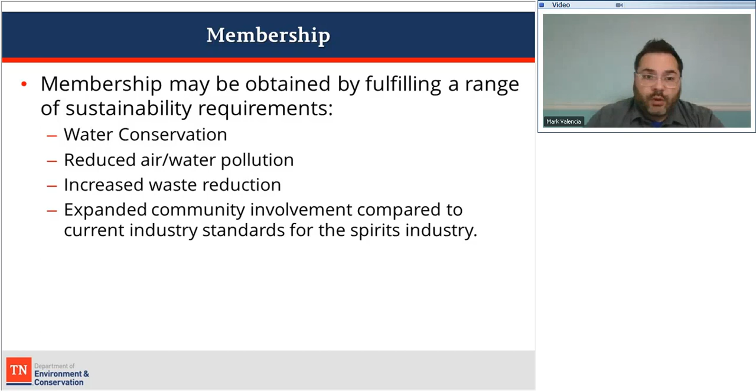So membership is obtained through several different categories. I'll go into the next slide to discuss that, but we have a checklist with 49 elements, and you have to meet a minimum of 25 items on this checklist. This covers water conservation, air and water pollution, and waste reduction. We like to include community topics as well, and I'll show you that in the next slide.

To become a member, you must apply. The application process is fairly simple - we have a single one-page application with your general information on it. In addition, you must submit the checklist I just discussed, showing that you're doing at least 25 of those 49 items listed, and you have to submit your annual utility data and production data.

So we need last year's water bill, electric bill, and gas bill, and how much you produced. The reason for that is we will normalize this data and produce a ratio. For example, we can show you it may take 5 gallons of water to produce 1 gallon of beer, or it may take this many kilowatt hours of electricity to produce a gallon of distilled liquor. With this data, we can compare it to national and international averages developed through other organizations, and show you where you stand among your peers.

Another reason for this is to establish a baseline. So in the future, you can see if that ratio is getting smaller based on practices you implemented after we did this. It's also a great way to look at your overhead - it shows you exactly how much water and electricity it costs you to produce your products.

Once we get all that data, the checklist and application, we will review all this information, compile it, and do some data analysis. We will also work with our Office of General Counsel within TDEC to make sure an applicant isn't undergoing any regulatory issues within TDEC. If they are, we'll let them know they can't be a member at that moment, but we can work closely with them to get back into compliance, connecting them with the right people within TDEC to get it worked out.

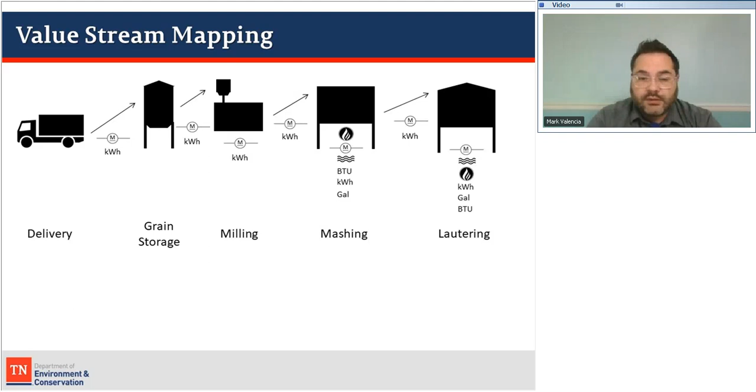A really good, interesting example as well is in the mashing process. So now you've got energy to heat up. So Bill may be able to show us ways we can reduce the gas that it takes to heat up that liquid. But what we're showing right here is the gas that it takes to heat up your liquid for mashing in. There may be an electric motor mixing that mash, and then you have water. So we're going to try to look at all of those steps and processes to see how much energy is being used in each step of the process.

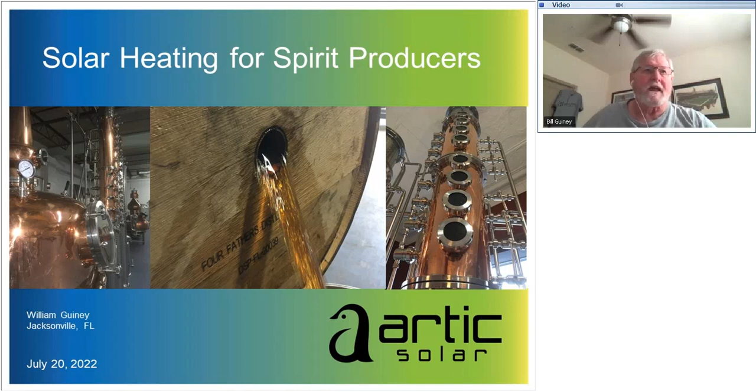Your program sounds outstanding. It's something that should be replicated in all states, no matter what the industries are. This is how you connect industries to the potential to save energy, reduce greenhouse gas emissions, and save money. So I'm going to talk about the solar heating applications for spirit producers. This would apply for basically any of them. It's a heavy lean toward the distillery side of the business, but wineries and breweries have much the same needs as far as heat goes. So I will also review the technologies briefly to talk about the application of the different solar technologies.

So, $60 million on energy was spent by distilleries in 2018. Unfortunately, COVID kind of put the squash on a lot of the craft brewers and craft distillers. Many of them I know actually stopped producing alcohol and started making hand sanitizers. So that became a fairly decent business to fill in the gap when their spirit sales were down. One actually was even making CBD oil for marketing to users of that technology.

So, we all know where the heat is being used, how it's used, and the importance of it. The advantage we've got today is we can produce enough heat to actually create steam. So I've got different ideas about how heat should be used in facilities. Many of them are double jacketed pots with steam injection. It can also be done today with high temperature hot water rather than converting it to steam, which takes an additional 970 BTUs to do that. We can utilize high temperature hot water running through the pots, but that's going to be slow in coming because it's a radical change from a supplier standpoint.

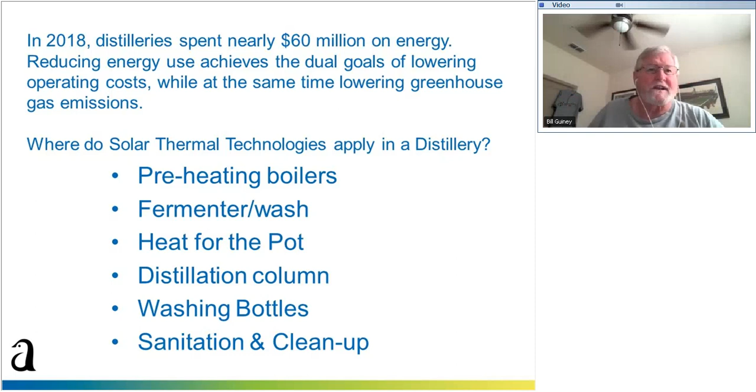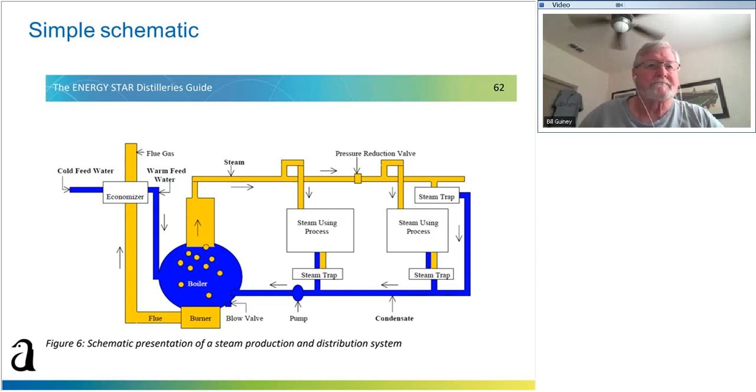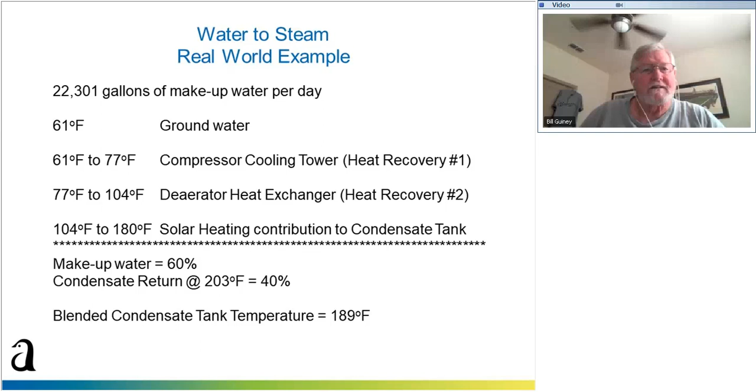Because the solar systems aren't cheap, there's obviously a capital cost to that, and the more you can reduce the size of the solar array to give you the production you need, obviously the better, the lower cost for the user. So this system, in order to raise the temperature up, was going to require 345 solar collectors. Because of space limitations, we could only use 288 in the calculations.

So the watts per square meter is the actual daily energy produced at the site. And I actually got this information from the user that meters both their direct and their diffuse radiation, so we're able to come up with our average annual and our average daily watts per square meter of energy that's available. And what's important about that is the delivery temperature is dependent on the sun. So knowing what that average daily production is as far as watts per square meter or sunlight that's available is important to us.

And we utilize tools like the Solar Advisor Model from the National Renewable Energy Lab and PVWatts to be able to capture the direct beam radiation available at the actual site. So we'll try to determine what the average daily energy is at the facility site to be able to do the calculations to determine how much we're going to need. So we know that the average energy per square meter is 5.96 kilowatts, and the efficiency is the efficiency of the solar collector.

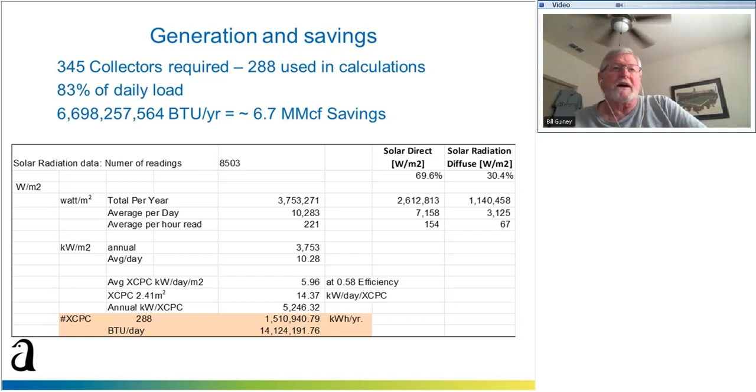And when you look at what the reduction in gas is, it's 6.7 million cubic feet in savings of natural gas in this application. So the bigger the distillery, obviously the larger the savings is going to be. And 288 collectors is a fairly large system. A budget for that is going to be somewhere around $600,000 for that system. But with the generous tax credits and some of the other incentives available by the states and the USDA, that return on investment can be fairly simple.

So looking at a typical design of a solar thermal system today, it's not rocket science. It's very similar to a small residential system. The only difference with a commercial is it's bigger.

Bigger solar arrays, bigger pipes, bigger pumps. Other than that, the design stays the same. So there's not a lot of rocket science or variables in the actual design of a solar thermal system.

So we're actually pulling the cold water out of the solar storage tank, sending it to the solar collectors. And in this case, we have 2 pumps in parallel. And the reason for that is if you lose a pump, you've still got 50% of your flow rate, so you're not stagnating your solar collectors, so you're still collecting heat energy, but not providing any overheating issues related to the solar array.

Another option that we integrate into systems today is a heat rejection unit. So in the event the facility shuts down or they have reduced hours or maintenance issues, or the solar array starts to run too hot, we can actually start dumping heat to atmosphere. The exciting thing about this today is there's been a lot of progress on thermal energy storage. So we're looking at how we can take that excess heat, put it into thermal energy storage, which will again reduce the amount of energy used during the operation hours.

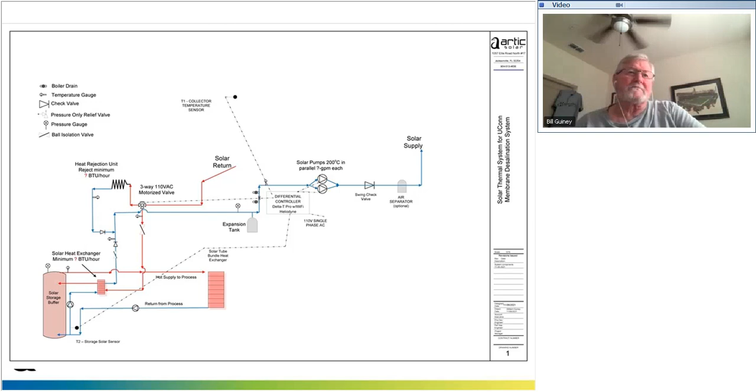So again, the advantage of this type of a system is it's all proportional. So a large system is going to produce X, a small system is going to produce Y, but they're all going to be designed the same way. So we figure out what's best for the integration into the facility, what the budget can bear, and how much energy they want to generate with the solar array. My recommendation is generally we size systems between 50 and 70% of their daily load. We rarely, if ever, design a system for 100% of the daily requirements for hot water or steam.

So this is the Four Fathers distillery that we have here in Jacksonville, where we're actually using a cast iron boiler. There's no burner on it, and we're taking advantage of the coil that's up in the top of the water table that would typically be used for hot water production at the facility. And we're actually running the 300-degree water through that, boiling the top of that water table and creating steam. We're injecting it directly into the main steam line.

And the advantage is the solar system is continuously running, so we're maintaining pressure on the steam line. When and if the production from the solar starts to reduce, then that pressure drops. His backup gas boilers will come out of idle and maintain the pressure in the steam line, so there's never a lack of steam in the system. And once the solar starts producing again and pressurizing that steam line, then the conventional gas boilers go back to an idle position.

So in this case, we're using 2 120-gallon thermal storage tanks with coils in the bottom of the tank, and that's how we're transferring the heat from the solar array to the storage tanks. So it's, again, a very simple design, and it works very well.

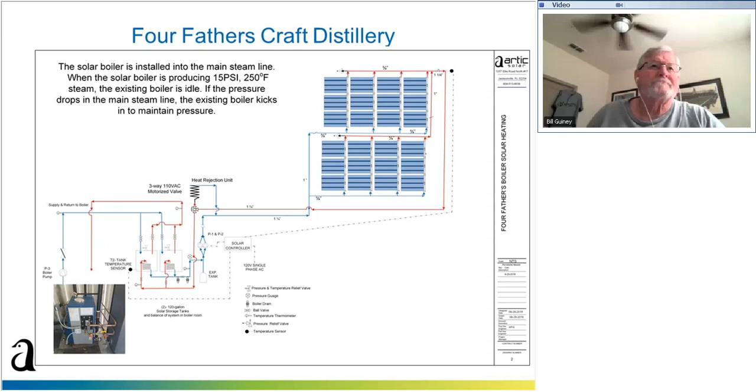So on a larger system that I started showing earlier, I mentioned that he had 60% of his makeup water coming from the 2 heat recovery units that's generating the heat up to 104 degrees, and he's got 40% of his condensate return going into the condensate tank. So because of this large volume of water, we're only able to reach that 87 centigrade, and then we're at 102 going into his deaerator tank before it goes into his boilers. But the savings, again, is significant. I think this had a 3-year ROI on this project.

And it's a very simple installation because we're just adding a heat exchanger to the cold water supply after the heat recovery before it goes in the condensate tank. So we're raising it from 40C to 82C to be able to blend in the condensate tank to be able to integrate that solar very easily. So as long as we know what the mechanical system looks like, we can generally sketch out an integration design.

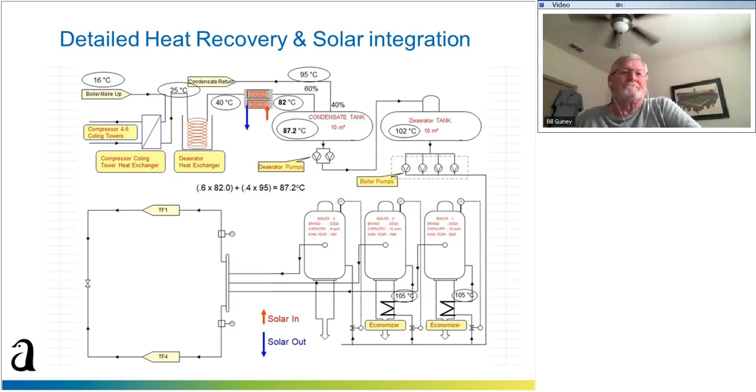So the different technologies available today in the marketplace are low temperature collectors that we typically see for swimming pools. They're the polymer plastic pool panels. And I say pool panels, but they can be used for any application because it's a solar thermal product. So generally they're going to top out at about 105 degrees. And the reason is that's the maximum temperature allowed for a spa. So that 105 is typically what they say is the maximum temperature.

The medium collectors, the flat plate collectors, and evacuated tube technology that we typically see for home and light commercial water heating will be anywhere from 105 to 200 degrees, and I'm stretching it there. Generally, it's 160 at the max, but some of the evacuated tube technologies coming out of Asia now can produce higher temperatures. And then when we get to the high temperature applications, that's going to be between 180 degrees and 400 degrees F, which means that easily they can be utilized to make steam to be able to inject it into a system.

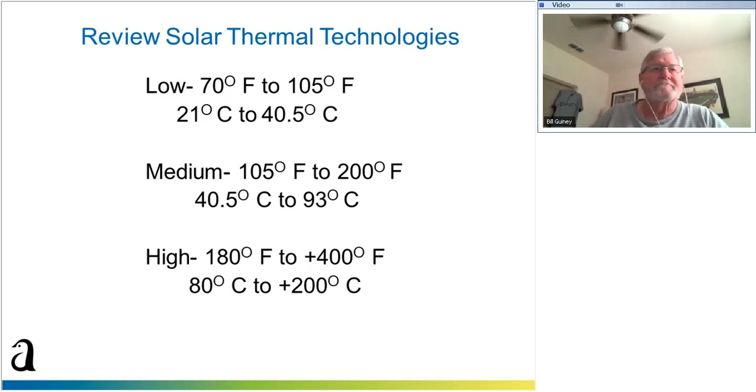So mid-temperature collectors, like I said, are glazed flat plate collectors, ICS tubes, which are integrated collector storage. They actually are storing water on the roof in larger tubes that are heated up during the day and transferred into the facility in the evenings, or the evacuated tube technology.

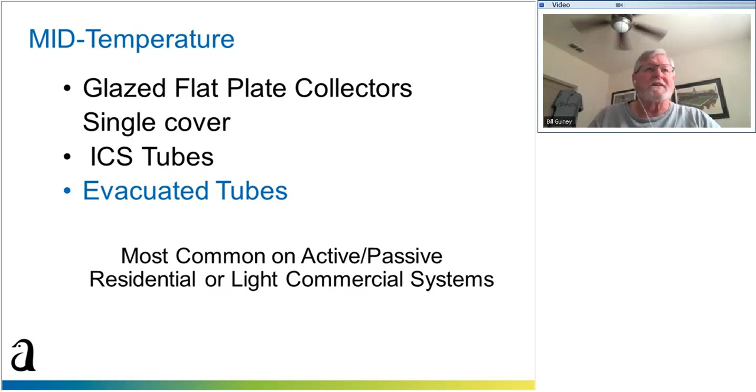And unfortunately, all evacuated tubes are made in China. It's the only place in the world that they're made right now. There were some being made in the United Kingdom, and that facility is shut down. So basically all evacuated tube collectors come from Asia. And we've got a lot of less than honorable solar companies in the United States that say their Chinese system is made in the USA, but that's absolutely wrong.

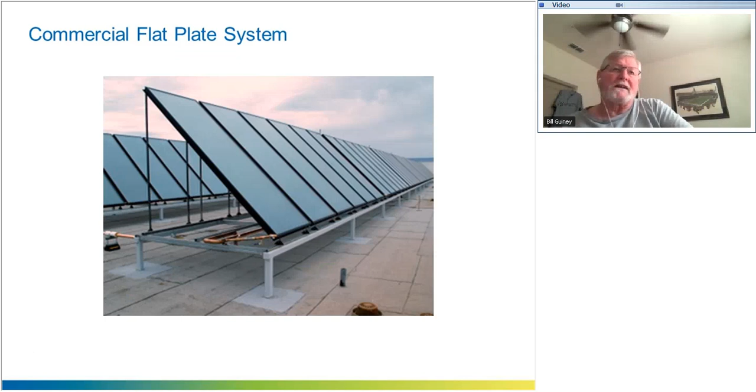So this is a commercial flat plate system. This is actually the headquarters at the Johnson Controls facility where I worked up in Milwaukee. So we utilize this solar array to heat the hot water for the Platinum campus, about 7 or 8 buildings at the JCI headquarters.

It's generally a lower cost technology because it is imported from China, but there's still, I think, quite a bit of work to be done on that. We don't really have a good idea of how long they're supposed to last.

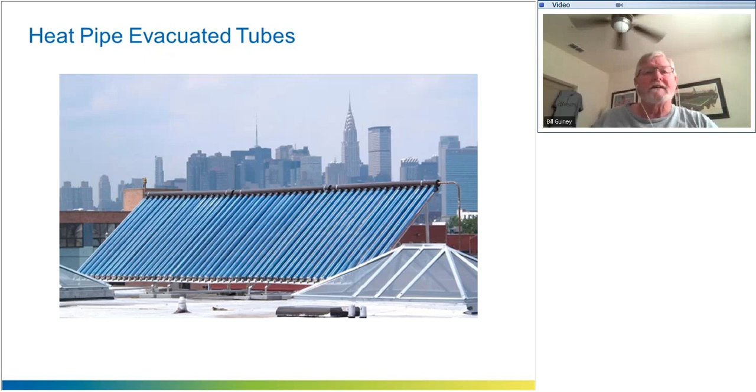So the advantage we see today with some of the technologies coming to marketplace, both here and in Europe, are technologies that are filling the gap, that 100 to 200 degrees centigrade, being able to do solutions that weren't feasible in the past. So I'm actually working on a desalination project myself with the US DOE. We were a semifinalist and working with Georgia Tech, Southern Company, and Lawrence Berkeley National Lab on a new desalination technology where we're going to clean up the blowdown water from a cooling tower at a gas power plant in Georgia. So this is what's remarkable today. All these industrial applications that weren't feasible in the past can be done today and can be done cost effectively.

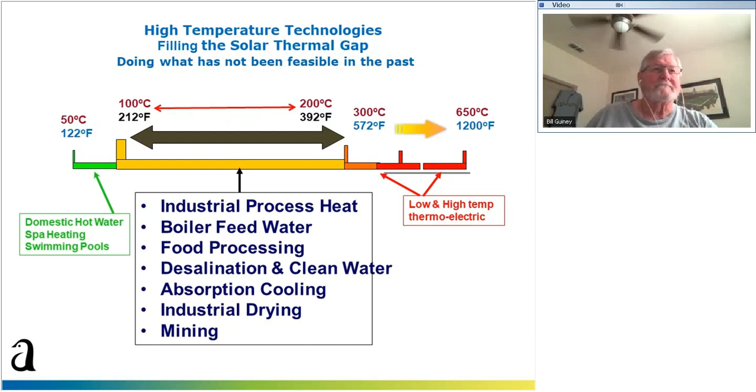So the high temperature collectors are concentrating designs of troughs, some evacuated tubes, mirrored reflectors like we see out in the desert as well that are concentrating sunlight onto a receiver tube. All the heliostats track the sun and concentrate all that energy on generally a molten salt solution. You've got a cold tank and a hot tank.

We see some double glazed collectors that come out of Europe that can handle higher temperatures, and the reason is that double glazing is like a double glazed window. It prevents heat loss, so they're able to capture more heat inside their solar collector, and some even have a triple cover on them. But the key is that for every layer of glass, you're losing solar transmissivity. So sometimes it doesn't make sense to go up to some of these triple covers, even though the marketing companies say they're ideal, but really they're not.

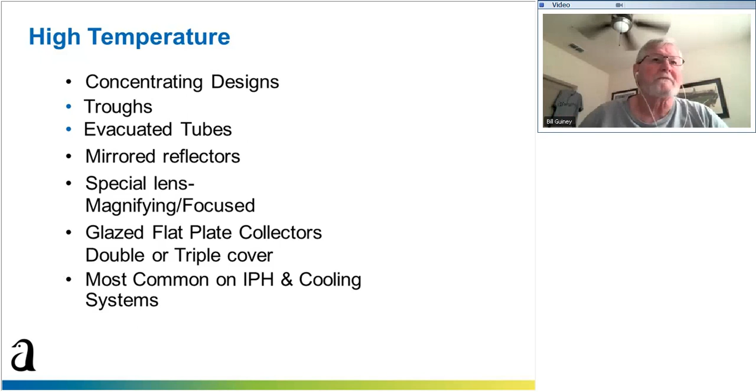And these are most common on process heating and solar cooling systems as well, utilizing lithium bromide absorption chillers or ammonia chillers to be able to provide cooling. So we're working with a couple of companies now on dehumidification of some of these marijuana growing facilities around the country. Some of the indoor growing facilities today need to do a lot of dehumidification and cooling of their facilities to keep buds and plants from rotting in the humidity.

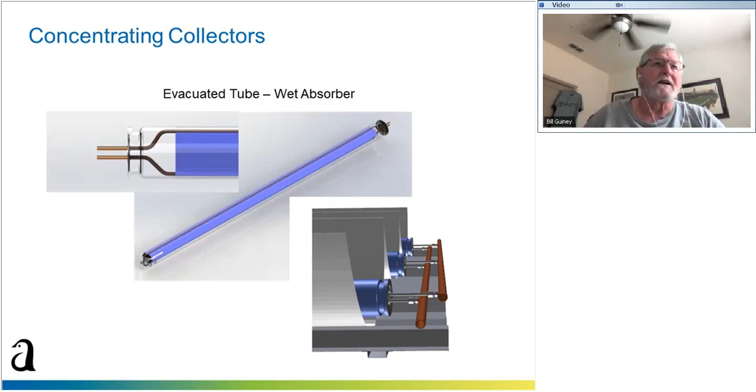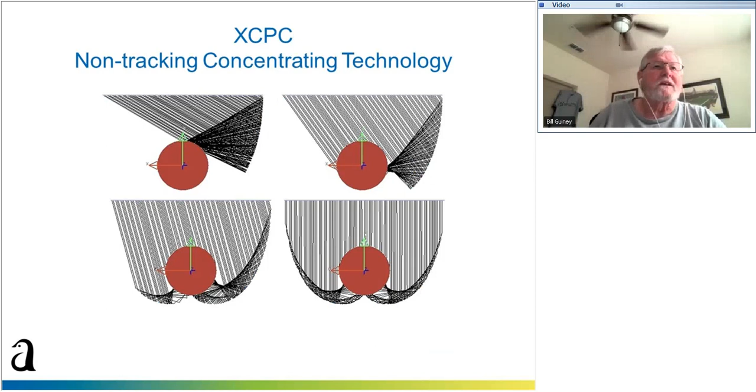So the evacuated tube wet absorber is basically a copper or aluminum absorber inside an evacuated tube with a supply and return line circulating the fluid through it. Our technology, the XCPC, is a non-tracking technology. So we utilize non-imaging optics, which allows the sunlight to hit the reflector and concentrate all that sunlight onto the evacuated tube and the receiver inside the collector.

So this is the Four Fathers distillery, and you can see it's not a very large system, and it's producing approximately 50 pounds of steam per hour. And again, it's just a simple, low-cost solution for a small craft distiller or brewery.

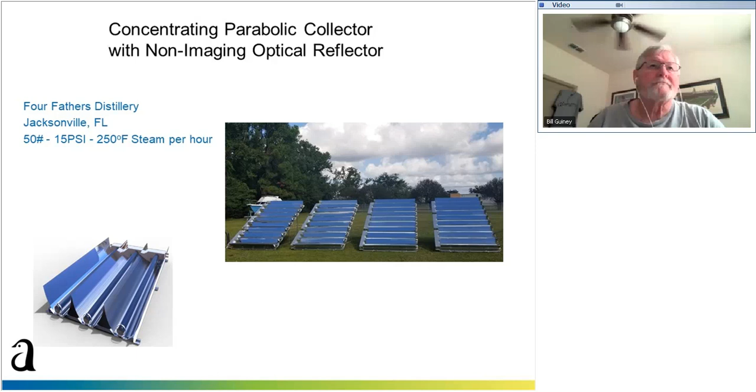Some of the other technologies is Absolicon that's making very good progress. It's coming out of Sweden. It's a tracking trough system, so it generally can be roof applied as well. There's a company out of Canada now that is marketing this technology here in the States. This Heliovis is basically a polymer bubble. It's like a tube that they fill up. It's got a polymer glazing on the outside, and the absorber runs through the middle.

The Rackham facility here on the bottom right is what we call a micro trough. So they're a smaller trough system, not the big 20-foot troughs like we see at power plants. And these are used more for water heating and industrial process heat up to specific temperatures.

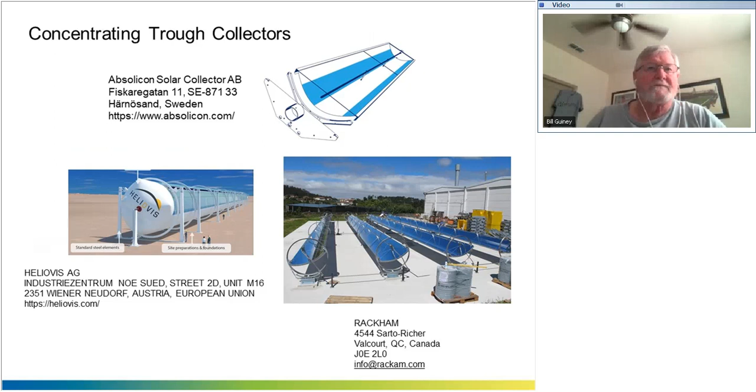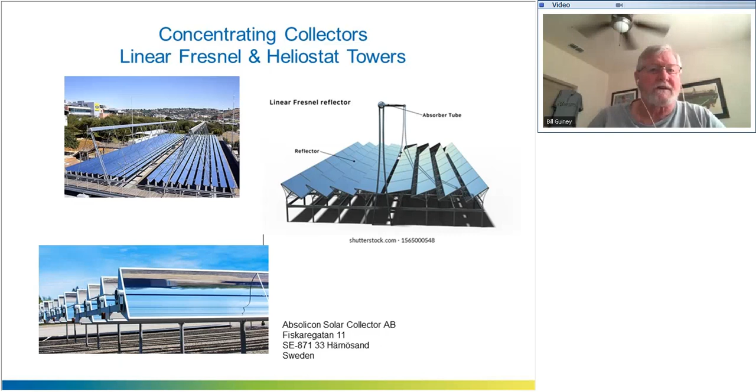So the collector and the installer, we have certifications for the collectors. It's required. I've just recently changed our absorber design inside our tube, so I have to retest and recertify. I have to send the collector to Spain to get a new test because they're one of the few facilities that can test high temperature collectors. So it's going to have actual performance verification, so we know how much energy that will produce. It's verified, it's quality, and it's consumer protection as well. So the IRS requires the SRCC certifications to be able to utilize the federal tax credit.

And so in North America, we have ICC, SRCC certification, so we end up with this certification stamp, which is critically important. We also have in Europe the Solar Keymark, so it's a different standard. Obviously, the Europeans don't want the Americans in their marketplace, so they keep up the standards to disqualify American producers, but now we're starting to see more cooperation because of the issue related to global climate change. So we're able now to certify our collectors for sales in Europe as well, finally.

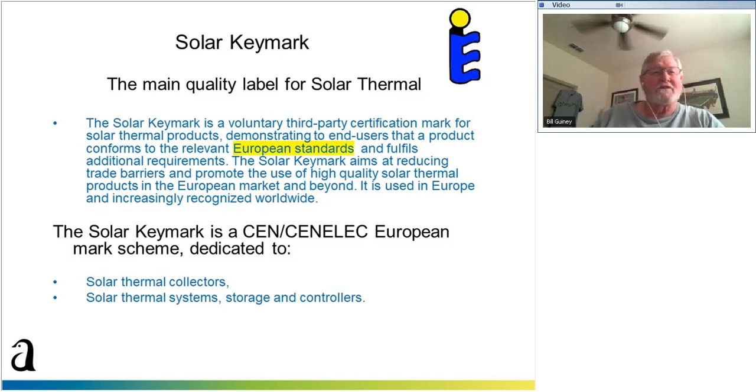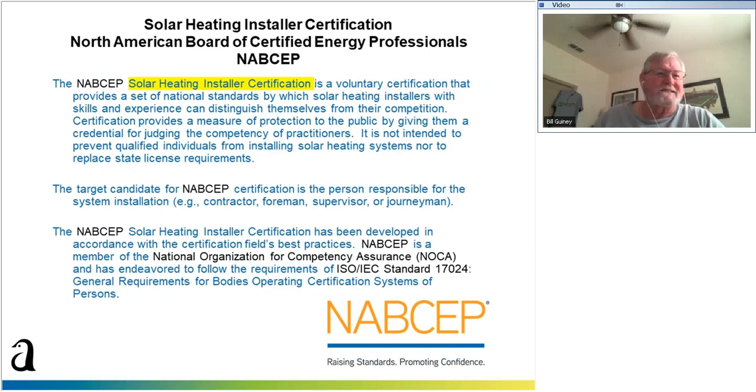So also the NABCEP, as he indicated, I chaired the entry-level committee, and this is a solar heating installer certification. Some states require NABCEP certification to utilize their incentives. So there's both photovoltaic certification and solar thermal installation certification. So basically what this does is, again, give the market more confidence in the technology and the certification of the people that are installing the systems, that they know what they're doing.

So we described the different collectors, the technologies and operating temperatures, the applications and the certifications of both the technology, hardware, and the installer. So that's it. Questions?